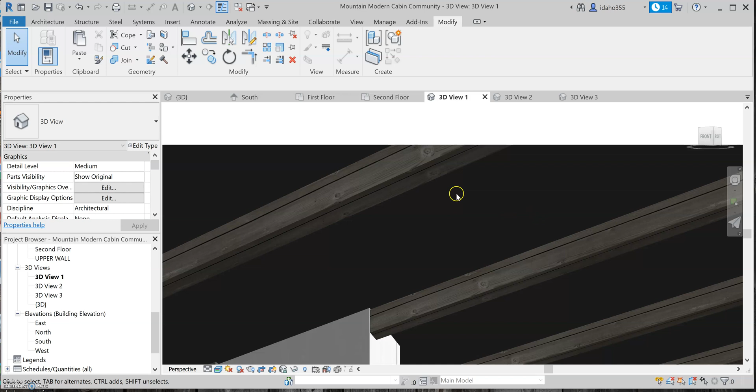Alright, in this week's video, I'm going to be attempting to show you guys how I've made these beams. So here's an example of them finished. They're not perfect, I do need to extend them just a bit more up there. But anyways, I'm going to be trying to recreate this in another room on one of my other cabins.

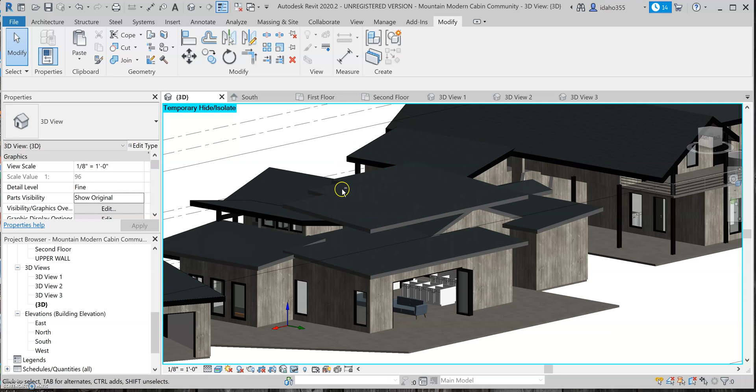So the way I've been doing this is I've actually been using a sloped glazing, just like I did for my standing seam metal roof. You can see better there. So similar concept to that.

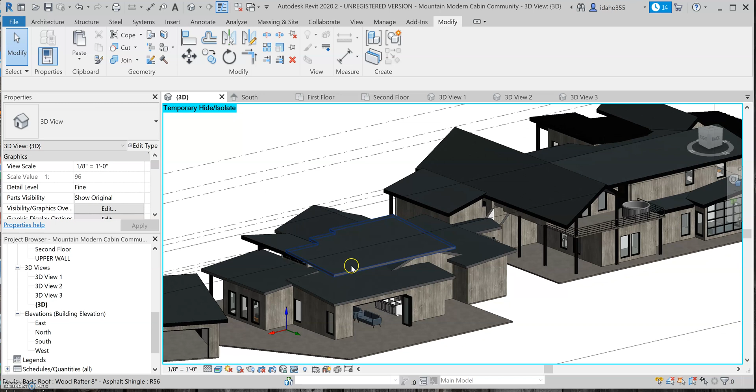So what I've done is I took this roof here and I copied it, and I've moved it up just so that I can see it, see what I'm working on. So to do that, you just click this roof and you'd Control C, and then you'd come to paste and you'd click aligned to same place, and then you'd adjust it up to see it. I'm not going to do it again because I've already got it. But once you've got that, you're going to come up here.

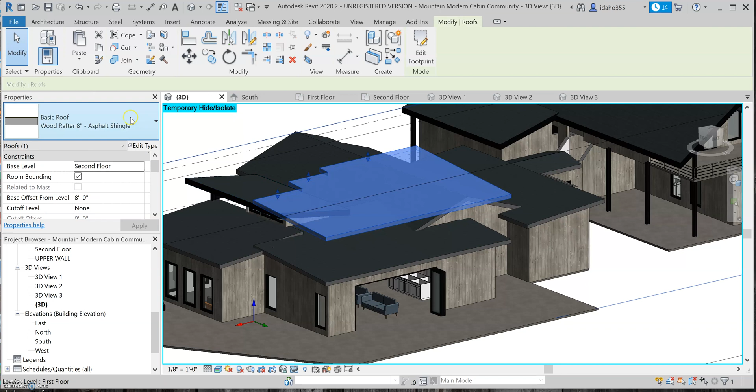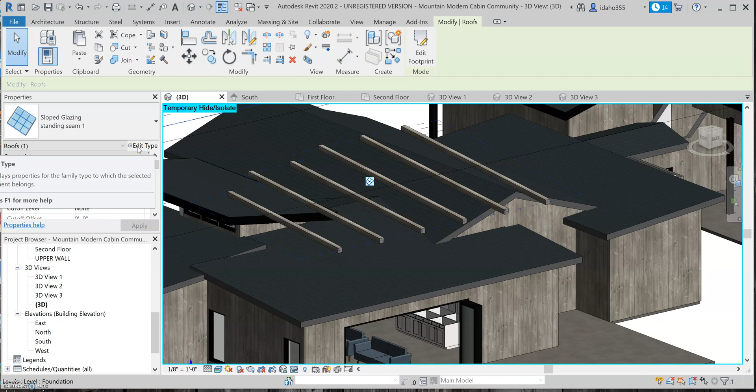I selected the wrong type. This is already done because I've edited the type on one of my sloped glazing things, but I'll show you how to get these settings. So you come to edit type and you're going to want to select empty system panel, empty, and then grid.

This is going to vary depending on which direction you want the beams to go, but for beams to go this way, you're going to want to do grid 1. So you click fixed distance, and I've got these 6 foot on center. I might go down to 5 feet to see what it looks like.

And then the other thing that you need to click is this mullions type for grid 1. You can see these two are affiliated, and same with these two. But to do that, you click on the caret, and there's these different mullion types, and I've got beams selected because this is a custom one I've created, and I'll show you how to do that in a second.

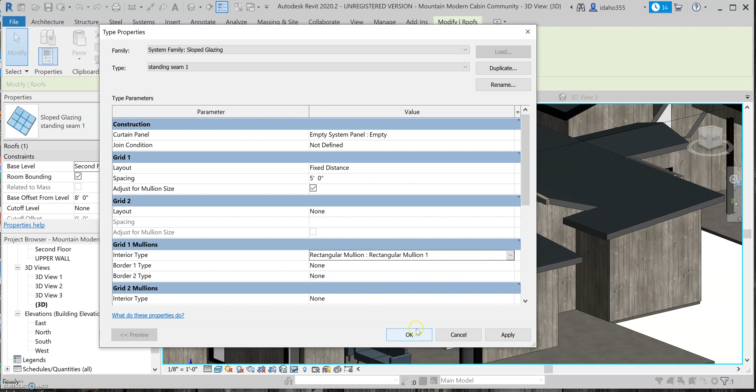But I guess just to show you the difference, I will do this rectangular mullion 1 to show you that it changes these. So now they're just black and skinnier. I'm going to go ahead and change that back to what it was. But that's how you would change these.

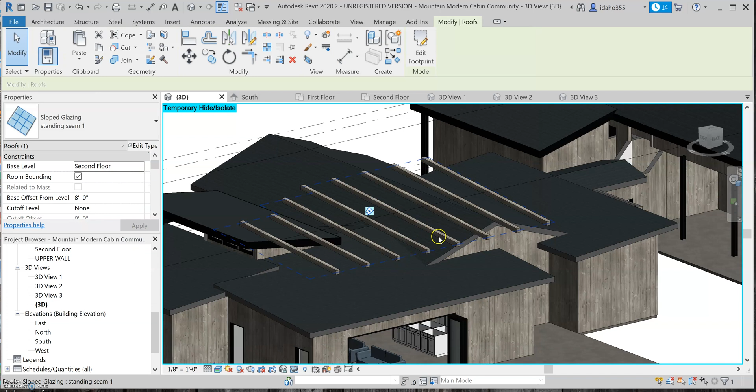And now they're back. So the next thing I need to do is get this down at the actual room level I want. So I'm going to try -1 feet and see what that looks like. You can see that these are sticking out, so I'll probably need to edit that.

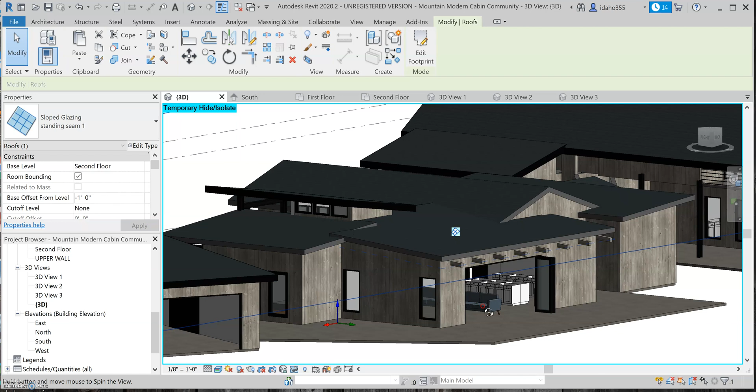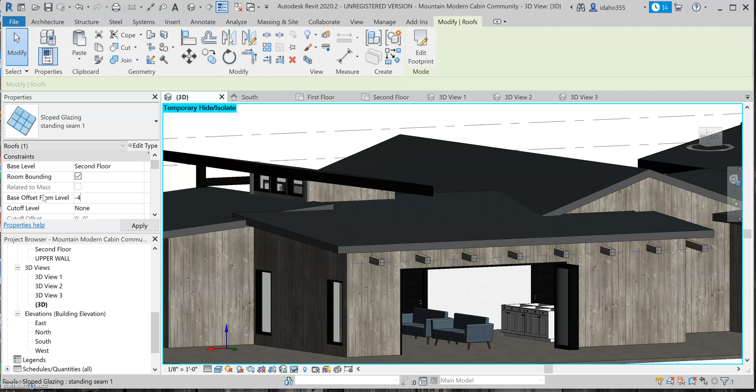I'll probably want to edit that. But if you were trying to achieve like an open rafter look, this would be a good way to do that as well. You just want to move it up to, like, let's see what 0 feet puts this at. Well, try -4 inches. Yeah.

So if you're trying to get open looking rafter tails, which is something that I think looks pretty cool, but it's not necessarily something I'm doing on this project, this would be another great way to do that.

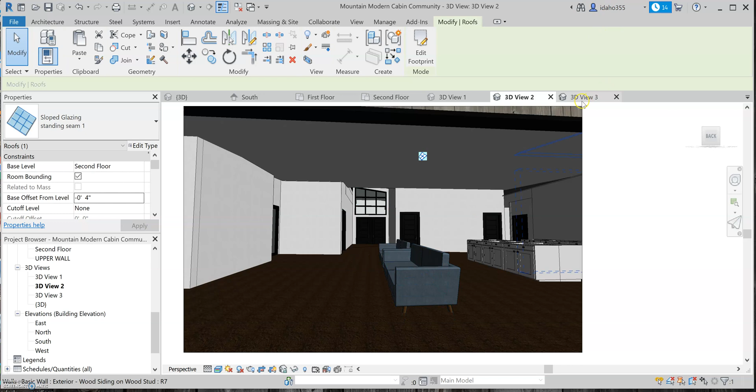But I'm going to go inside the room to see. Okay, so we can see that these beams are not low enough to appear in this room. Don't worry about this brown floor, this is the soil. I haven't fixed my site. This is not the right room, but I will show you.

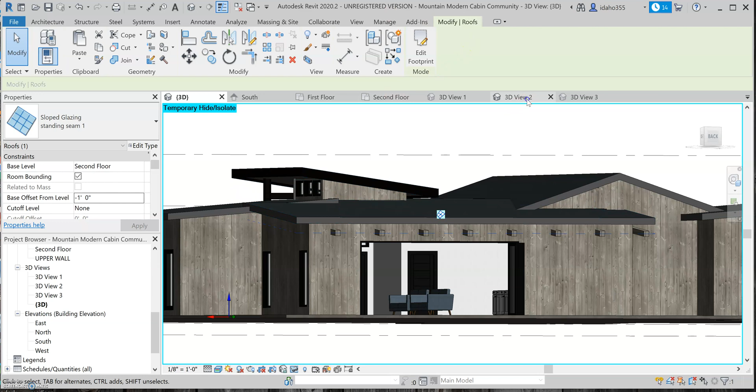I've done some beams here. Let's see. Alright, so now I'm going to come back out to 3D, and I'm going to do -1 foot again. Let's see if that places them in the right spot. Okay, so we're getting very close to where I want these. I'm going to try and go down just like another inch to see how that looks.

Okay, I'm pretty happy with that. So I will come back to 3D. I'm going to adjust my section box so you guys can see this better.

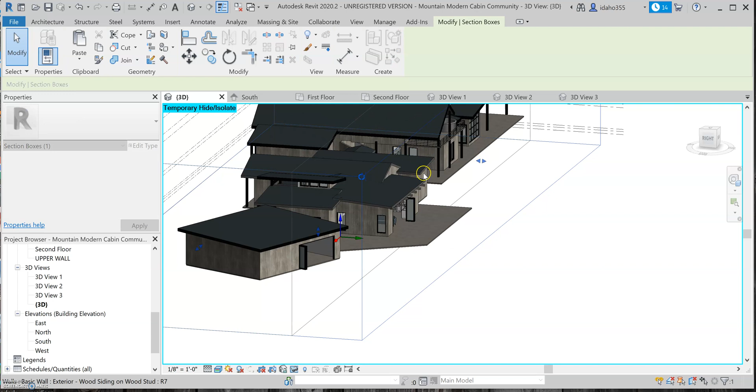As you can see, I'll come into this room. I've got a ceiling in here that I'm kind of trying to base these off. If you wanted to base it just off the roof, you could do that as well. But here's how I've made the beams inside my cabin.

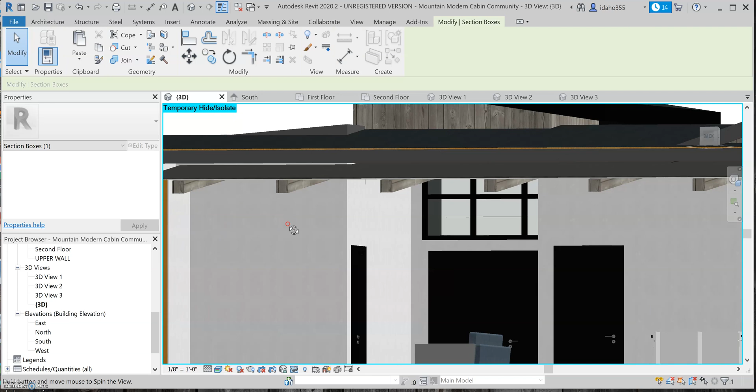It's just a lot easier than selecting the ceiling and modeling in place all of these beams, because that's something I've done before and it can be quite the hassle just trying to get this plane to be flat and model it and have it all look right. So this is just the easiest way I've found.

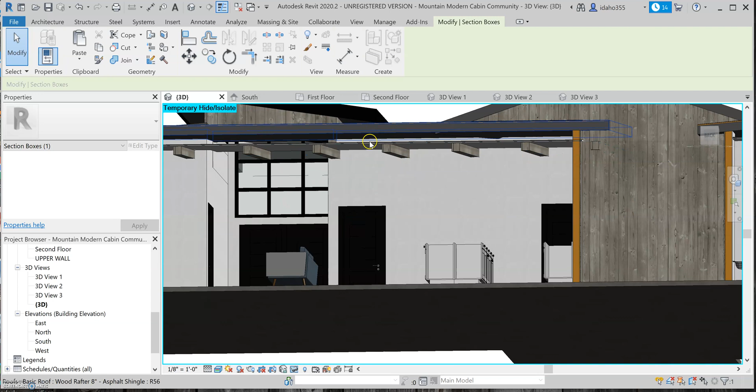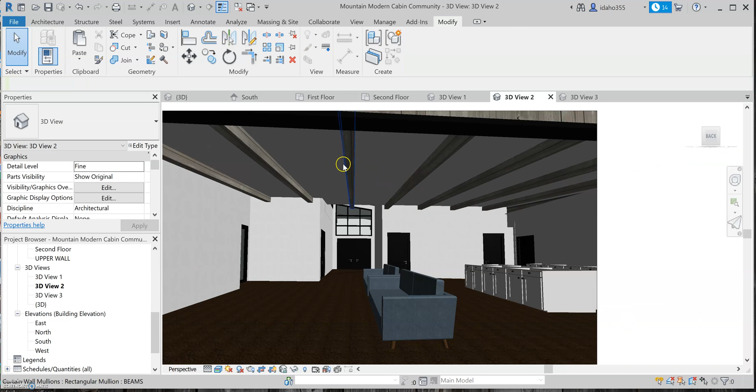I don't think this is going to work in every case. Obviously you're going to have to modify some things. Let's see, I'm probably going to have to model in place a beam across here to make this look right, because this beam obviously wouldn't just hang out here with no support. So you may have to do some modeling in place to make this system work as a whole, but overall I think it's a pretty good way to do this.

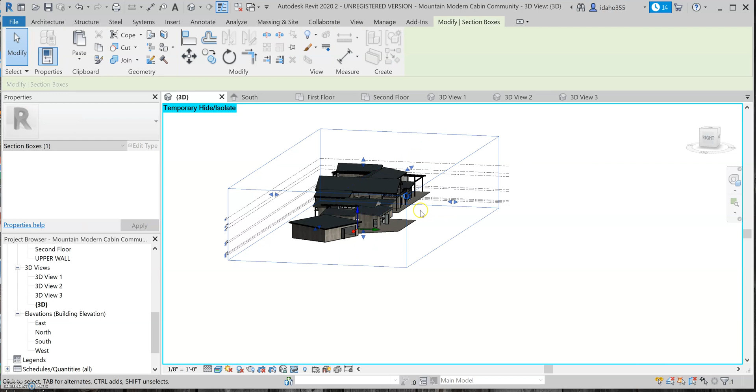But now that I've got these in place, I want to make it so they don't hang out past the cabin wall. And this is going to be pretty simple, but I'll just show you guys how to do it. So you'll select that, and you'll click edit footprint just like a roof.

And I'm going to do this in 3D. You cannot see the wall below, so I'm just going to guess.

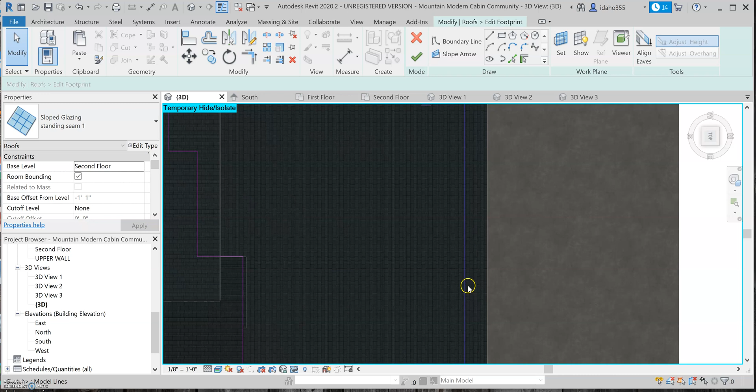You can see those are still sticking out a little ways, so I'm just going to bump those in a little bit closer. Obviously I could hide the roof below and do this a lot better, but just kind of guess and it should work alright.

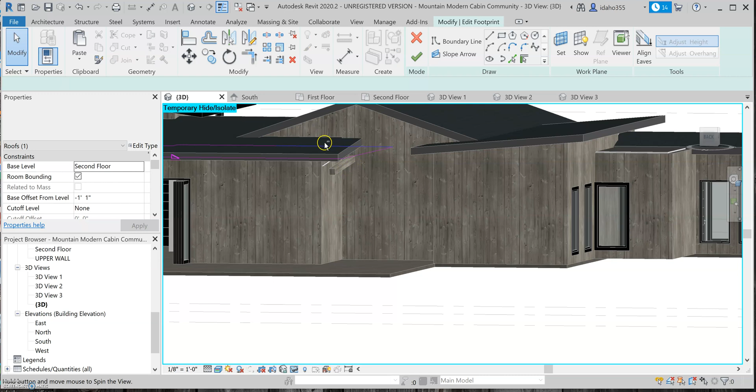Okay, so now they're not sticking out of the cabin except for over here. I will have to adjust this. Probably not going to do that now, but just know that if you have stuff hanging out like this, typically you just need to adapt the size of your roof system. Probably, I guess there's no issues over here, but I'll bring this in just because.

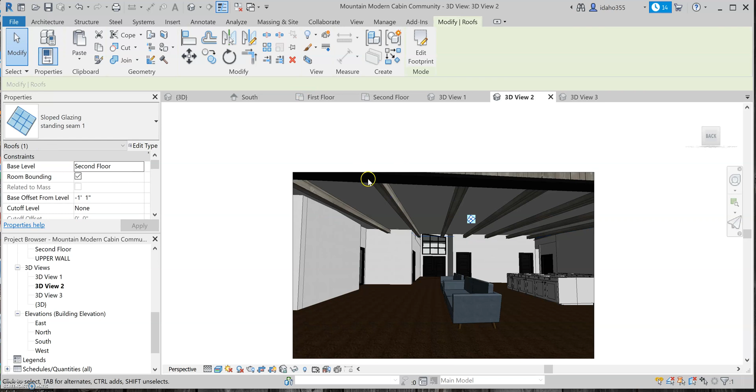And then there are all my beams. So now that these are in place, I'll show you. Perhaps this isn't the best way, but essentially these are the same as these mullions here in this glass curtain wall.

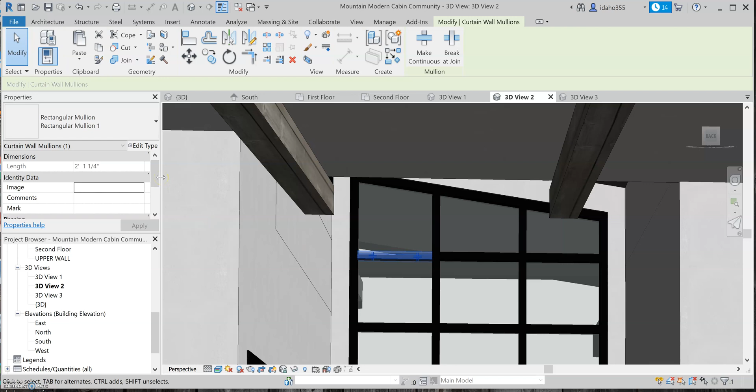So what I did to actually create these is I clicked on this, which was like the preset in Revit, and I came up to edit type, and I just adjusted the width. So I believe this is a center line dimension, and it'll put 1.25 inches on one side and 1.25 inches on the other. So I just bumped that up to like 3.5, and then put my thickness at 7 inches, and then changed my material to wood.

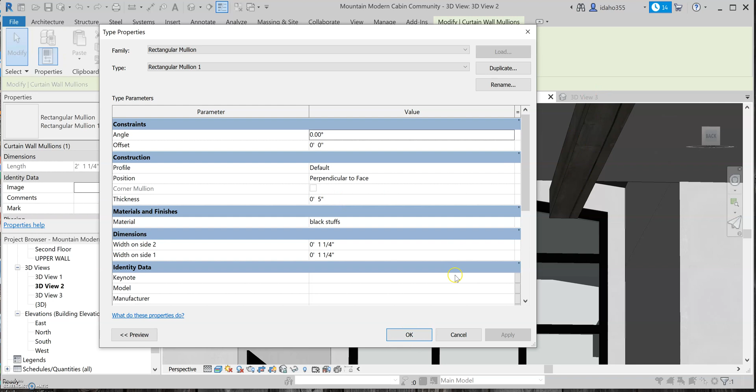Obviously, not sold on that wood, but just for the sake of getting it in place, it works. But that is how you would create the actual beam. Anyway, I just think this is a lot easier way to get the beams in a space, and it centers them all, so you don't have to deal with that. So anyways, I hope that helps any of you that may be trying to model some beams in your project.